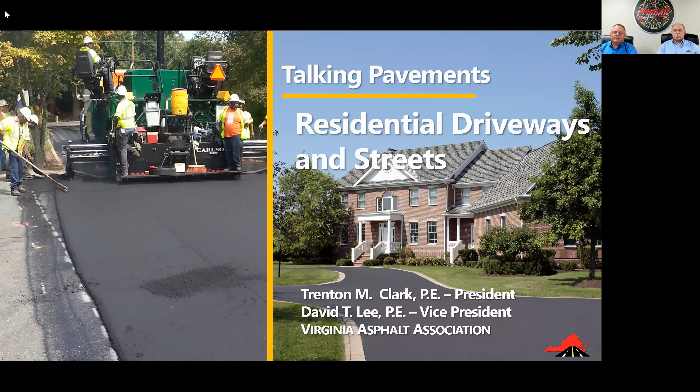So first and foremost, who is the Virginia Asphalt Association? Well, we're a trade association that was formed nearly 70 years ago. Over the time, we've really faceted ourselves on being a training and education, a technical resource. So that's what we spend a lot of our time doing, is training individuals, not only members, but the public at large, on what pavements are and how asphalt works.

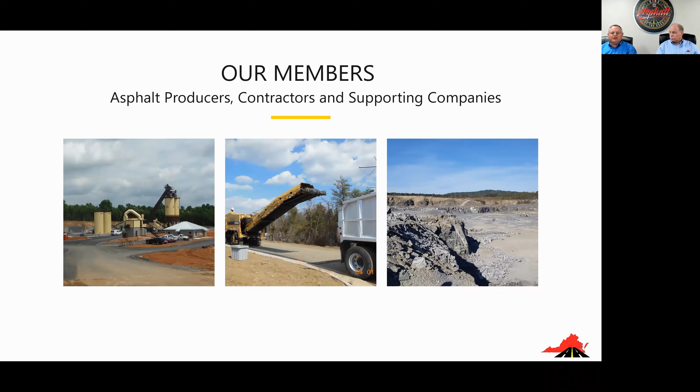We have a very large membership. We have about 125 members, not only companies that are located here in Virginia, but some of them are across the country. We have everything from the companies that produce asphalt to those that lay asphalt, mill the asphalt, do the pavement markings. And then we have a large number of members that are suppliers, whether they supply aggregates or asphalt binder, maybe they provide insurance services, maybe they do some consulting. So we're very diverse.

Just a little bit of background on David and myself. We're both licensed engineers here in the state of Virginia. I've been in the industry for nearly 28 years.

You would not know it looking at me. I know I'm much younger looking, but David has been in the industry a lot longer, as you can tell. And I look it. The gray mustache, that's what gives it away. And I think that turned gray when he started working for us a few years ago, working with me.

But between the two of us and the whole staff here at the association, we have nearly 100 years of experience in a wide range of areas, from how asphalt is produced, how it's designed, how pavements are designed. So we have a good background. So when questions come in, we can help a lot of folks out.

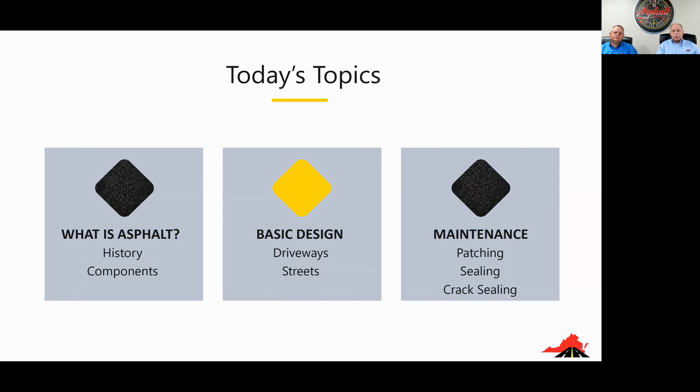Absolutely. So what are today's topics? Well, we're going to keep it pretty simple. What are we going to talk on, David? We're going to talk about what's asphalt, just a real quick basic history, the components of the asphalt. Then we're going to get into some basic design for streets and driveways. And then we're going to focus on the biggest thing on your minds, and that is the maintenance of those facilities, whether it be a driveway or a parking lot. We're going to talk about sealing, patching, and things like that. All the things that people constantly ask us questions about.

Well, first and foremost, asphalt itself can be a naturally occurring substance. Absolutely. But we also can refine petroleum products. It's adhesive and cohesive, so it's sticky, it's able to stretch, it's able to move, which makes it very durable. It's not soluble. Obviously we don't want it to be washed away when it rains and things like that.

We also want it to be highly viscous, so that when you're placing the material, it can be placed very easily when it's hot, but then it solidifies and creates a firm structure when it's complete. David, you'd be surprised how many times we get asked, does it wash off? Right. Liquid asphalt does not wash off. So we want to make sure everyone's clear on that with the materials that we're using.

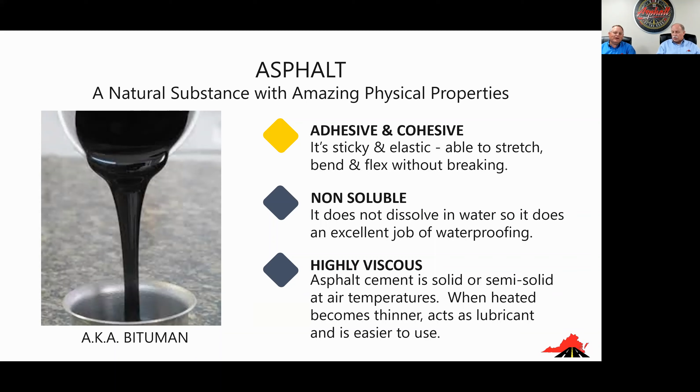Water won't wash away, so it'd be very detrimental to our roads. Exactly. Keep in mind, like Trenton just said a minute ago, asphalt comes from a number of sources. Many years ago, obviously, it was more of a naturally occurring product. There was the Pitch Lake from Trinidad. There's the La Brea tar pits in California. But today, most of the asphalts that you see are a refined product from petroleum production.

Right. So we've been refining it here in the U.S. and around the world for well over 100 years. A lot of the initial roads were coming from those naturally occurring tar pits from around the world. But today it's a very refined, a very controlled substance.

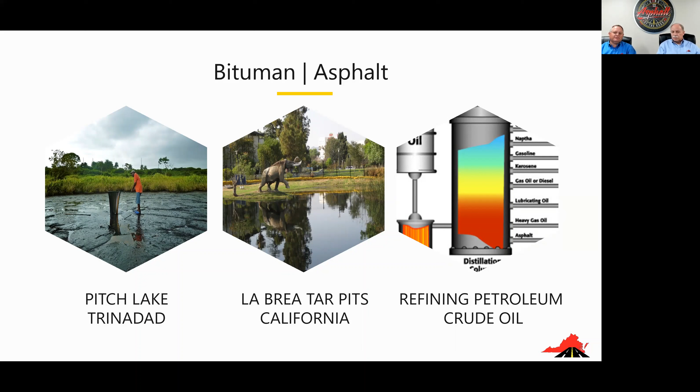So let's talk about what the components of today's asphalt mixes are. Basically, they're made out of three things: the asphalt binder that we just talked about that comes from that refining process, then there's going to be the aggregates. There's a real fine aggregate that's combined, and then there's a coarser aggregate, larger particles, that are all combined together to make the components of asphalt.

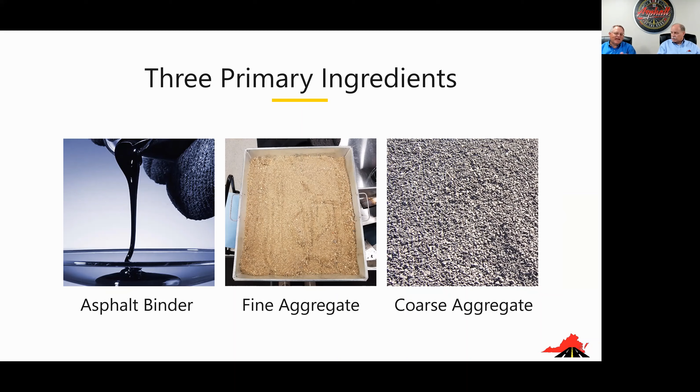And when we talk about fine aggregate, for just a frame of reference, you're thinking of things about the size of sand. Right. So the sand at the beach, sand that you see along riverbanks, that's really what we call fine aggregate because of the size. And then when you look at the bigger materials, we call it coarse aggregate. Right. It's just nomenclature. So we may throw these out, but it's big rock, sand size rock, and liquid. That's mainly what's in asphalt, but we do have today so many other components that go into it.

We have recycled asphalt. So the roads that are out there today probably have asphalt in them that was laid 10 years ago, 20 years ago, 30 years ago, because we went through, we milled them, we processed them, and we blended them back in. That makes asphalt roads very sustainable, very resilient.

We have tires. We've done ground tire rubber projects all around Virginia. Yep. Yeah, I mean, one of the first ones, going back into the 90s. Yes, in the early 90s, we did a number of test sections for rubber tire, both for crumb rubber, particles that are like the aggregates. And today we're also combining it into liquid asphalt itself. Yeah, that ground tire rubber.

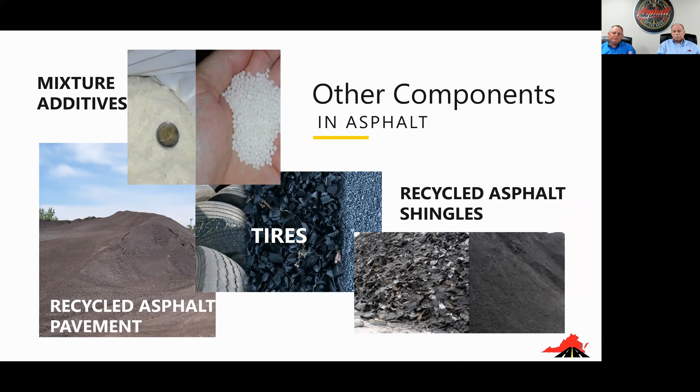We use shingles. So if you see shingles that are pulled off of a house, they're not necessarily going into a landfill. They can be taken to special facilities, ground down into, again, very fine particles and blended back into it because those shingles have a lot of asphalt in them. That's very stiff and we have to do certain things with them to utilize it. But again, asphalt in and of itself is a very recycled product, the most recycled product in the world.

So what all is in there? It's mainly rock, mainly that fine aggregate and that coarse aggregate, but you need about 4 to 6%, depending on the material itself, of the asphalt binder, as David talked about, just to hold it together, to give it its strength. So we can protect against cracking, we can protect against rutting. All these things are going together in that mix design or that asphalt plant to make your driveway.

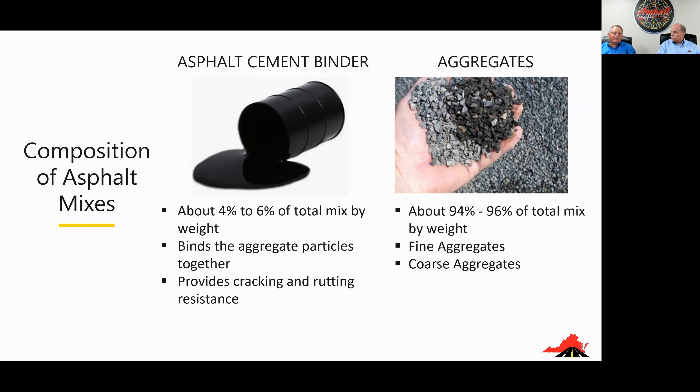So let's talk about the basic pavement structures. Yeah, as we talked about a minute ago, we talk about pavement structures that are the actual driveways, and then we talk about pavement structures that are out on our roadways and our parking lots. And each one of those has various different types of structures.

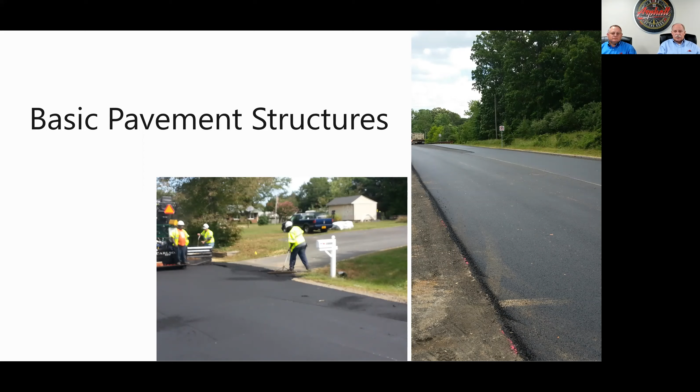Well, we have a section in our website that's available for your use and everybody's use that talks about pavement design. The summary is there for the mix design guidelines, so you can get in there and see what the mixes themselves look like. And then you can go on down into that and you'll see that there's stuff about street design, driveway design, parking lot design, and things like that.

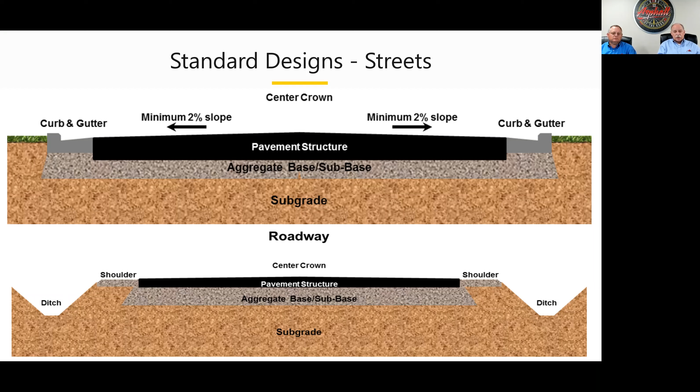It's the same aggregate that's used in our asphalt mixes, but it's used in a different way for a sub-base aggregate below the asphalt pavement structure. And then you've got your subgrade. One of the most important aspects of your pavement is to ensure that your subgrade is strong. When we look at the streets themselves, David showed you the typical section, but we use layers of asphalt and layers of stone to build these roads.

So when we go through a design process, there's certain minimums that we want. So on our website as well, we have recommended minimums. Along with that, we also have recommendations as far as what material to use. Because the one thing we have in this industry is a lot of different options, but not all the options are really applicable to these instances. So you have to look at what's available.

And if you're having a home builder build your driveway, you need to be aware, typically they'll choose that material that will work best on your driveway. But if you as a homeowner want to make a change, again, be aware of what's out there. You may want to make sure it's one with smaller aggregate in it because it looks better. Right. So a little smoother, your kids might be able to play on it a little bit better. Yeah. Things like that. Absolutely.

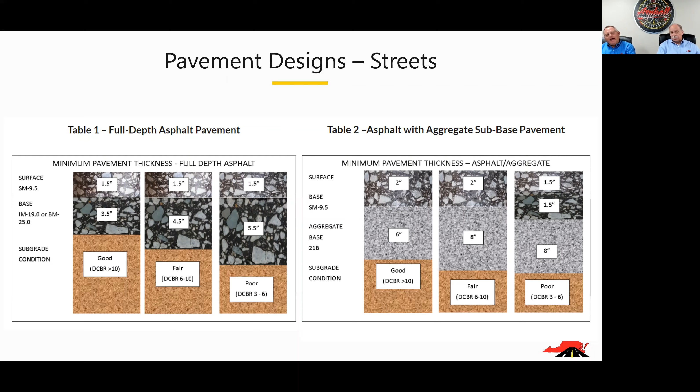Which are very important. So again, you look at it, we have it if you're building straight on subgrade or basically straight on the dirt. If you're going to put an aggregate layer, what type of thicknesses, what type of materials, and we have it both for streets and driveways. We call full depth when it's built straight on the soil itself, on dirt. If we're putting a stone layer on it, then you'll notice you need a little bit less asphalt.

The thing to keep in mind with driveways is if we can build them properly from the beginning and we can keep the water out of them, they should last almost indefinitely. They will crack, and we won't say that they won't, but from a structural standpoint, they'll be perfectly fine. And that's a great point, Trenton. If you've got a driveway or you've got a roadway that's going into your subdivision, it's critical that you get the water off of that roadway.

You don't want that water to pool on top of the roadway. You don't want that water to pool on the edges of your driveway. That water needs to be completely shed from the pavement itself. Otherwise, it'll get down to that subgrade I talked about earlier, and it'll saturate it and get it wet, and then you lose the strength of your pavement structure.

Right. I mean, cars themselves do very, very little damage because they're so light in terms of everything else. But you put a very saturated subgrade underneath of it, your soil is very, very wet, then it doesn't take much more than a car to cause it to fail. So that's why you'll see failures in driveways. It's usually because it's an area that's maybe the size of a kitchen table, but the subgrade got wet. That's exactly right. And the same with the road.

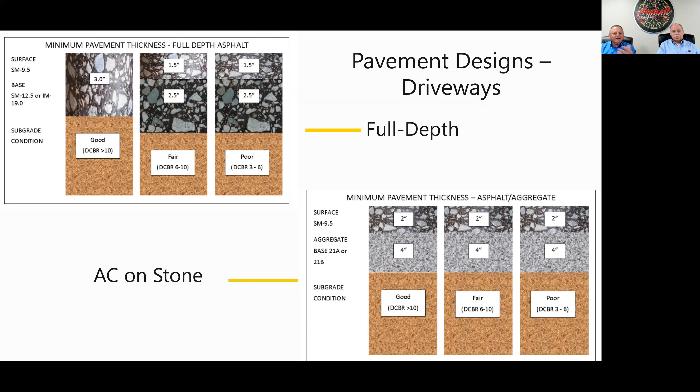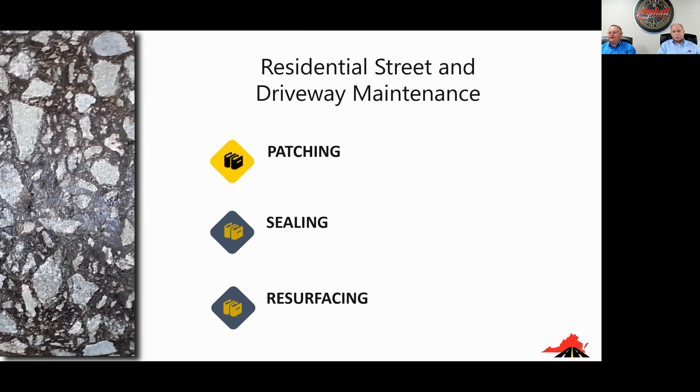So let's go ahead and assume we built it the right way. At times, it will need to be repaired. It will last a very long time, but just like all of us, we need a little medicine. We need a little preventive maintenance. So there's different things that are available to you. We can do some patching, we can do some sealing and resurfacing, and we'll touch on each one of these.

So the one question we get a lot: I need to do something to my driveway. Our initial question back is, can you send us a picture? That's right. Because while you may be able to describe it, we need to be able to see it because we can't go to every location. So send us a picture. So do you have a pothole? Well, if you have a pothole, you have an area that needs repair.

And we have to understand that to be able to provide you some guidance and direction. Absolutely. You may have a depression. Why? Well, sometimes that subgrade or even that aggregate layer doesn't get compacted, and over time, you'll see that that asphalt will just depress, and you may need to fix that just from a safety standpoint, a tripping hazard, cut it out and patch it back.

And then, of course, the base failures. Typically, we'll see these more on residential streets where just the subgrade got wet, repeated loading, you have heavy trash trucks. Maybe you're in a subdivision where they're still building houses. Those ready-mix concrete trucks are extremely heavy. You've got loads coming in with drywall, lumber, all those things over time will cause that pavement to deteriorate.

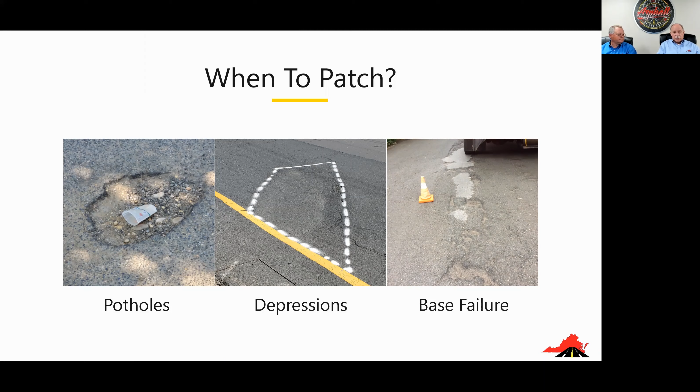And many times when they're building a subdivision, they'll actually keep that final surface off the roadway until they get all that construction complete. But when they do that, it's very critical that all the areas that have deteriorated, like Trent just described, get repaired before they put that final surface on it. If they don't, then some of what you see in these pictures can occur. Absolutely. But David, talk about sealing, because that's a question we get a lot.

Sealing is one of those things that everybody likes to see a black surface. Obviously, asphalt's like any product like this, it's going to oxidize over time. It's going to tend to turn gray over time. But we like to think of that as a good thing, because as long as it's not cracked and it's not potholed, and you're not seeing any other deterioration, it's doing exactly what it's supposed to do.

But we all recognize that sometimes on a driveway in particular, you want it to look black. You want it to look that way. So sealing will provide that. It'll provide a nice uniform surface appearance. But at the end of the day, most of the time, sealing, particularly early on, is something that's there for aesthetics purposes.

Right. So often we get asked, well, we were told to seal 1 year after we paved our driveway. And my question back to whoever asks that question is why. Why would you seal it? Again, if they've got it compacted well and keeping the water out, then there's really no need whatsoever. At that point, it really shouldn't have grayed out very much.

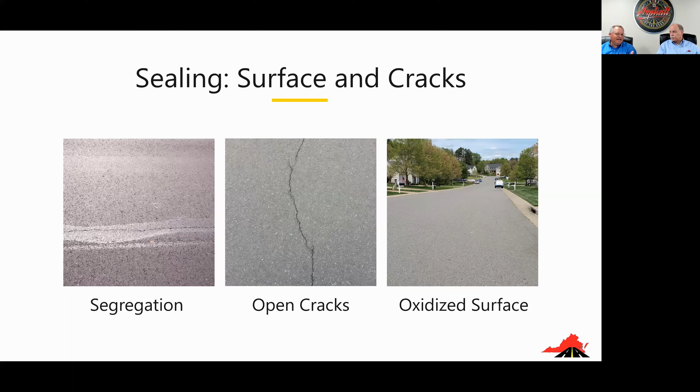Where we used to have an office, the parking lot was built in the mid-'80s. When we left that office last year, we had never paved that parking lot again. All we did was seal those cracks that formed to help keep the water out. And that's what sealing those open cracks does, it keeps the water out of that subgrade so it doesn't deteriorate, because even cars driving over a very wet subgrade will cause a failure. Exactly. But David, there are times when you've got to resurface. Absolutely.

And when you do it on a driveway and when you do it on a street, really two different areas. If you've got extensive potholing in your street, probably time to resurface. You see lots of cracking. But on your driveway, you really have to make some assessments on, one, what are you willing to look at? If you don't want a patchwork quilt.

Right. Yeah, for a driveway, sometimes if you look at it, it's as much an aesthetics issue as it is a surface structural issue. You might be able to patch it and it actually perform over time, but it's not going to give you the appearance you may want. So then sometimes you need to come in and just resurface the whole driveway.

And keep in mind, if it's on your driveway, again, you can patch it, you can crack seal it, and you can seal over top everything. It won't hide it. So you will see the patches below it. You'll see the crack sealing below it. If you do choose to resurface, then you really have to make the determination, do I start over? Right. Do I take the old asphalt off? Do I repair that sub base, all that aggregate layer, or maybe the soil that I'm sitting on?

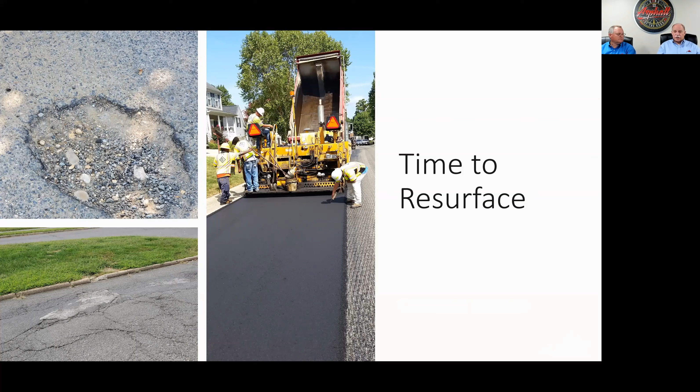If I decide to put a new surface on top, I've got drainage issues I've got to consider. Last thing you want to do is flood your basement. That's exactly right. So be sure that the grade's right. So if you're just going to overlay your driveway, it's obvious you don't want to tie into your garage to where now all of a sudden all the water that hits the driveway goes flooding into your garage. Yeah, all big things to consider.

Some closing thoughts as you go through this. If you're building or you're resurfacing, even if you're planning on having somebody seal it for you for aesthetic purposes, choose the right contractor. You can find them through the Better Business Bureau, look for neighbors or others that have done it. A lot of our members work with the companies that do the driveways, that do the sealing. Absolutely. Call and ask them. They may not give you a name, but they'll give you a list of names.

That's right. And sometimes just be careful. Somebody might show up at your door and say, I've got some leftover mix and I'm ready to pave your driveway. Be extremely careful with that. You need to be sure the contractor's the right contractor to do the work. And remember, if they're coming to you with leftover mix, what is it? Yeah, it's cold. And remember, cold mix is one of the things that causes the most problems when you're building it.